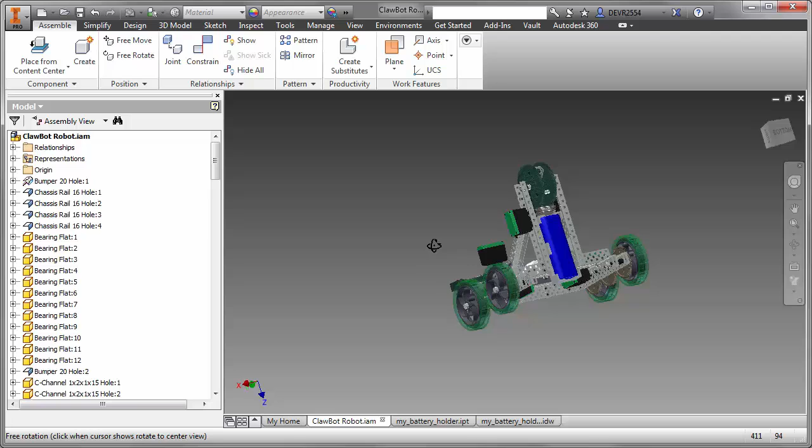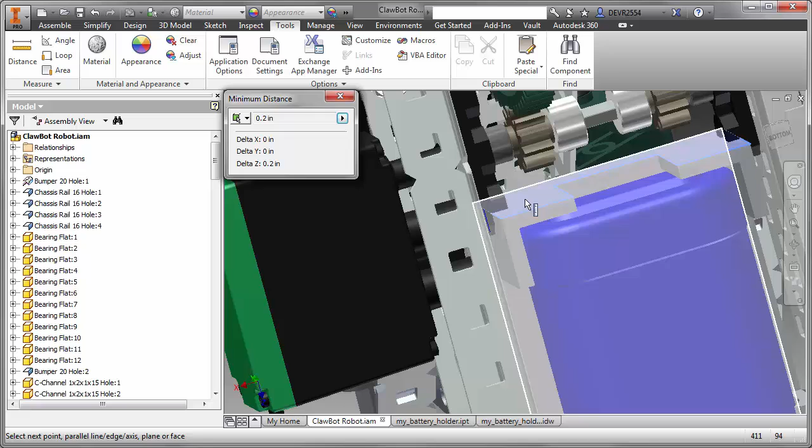The design team have reviewed the digital prototype of the robot that I sent them and have identified two problems. The first is between the battery holder and the flat bearing, so there's some interference there. Just going to go out and measure that. So from the flat surface on the bearing to the top surface on the battery holder, and that's 0.2 inches.

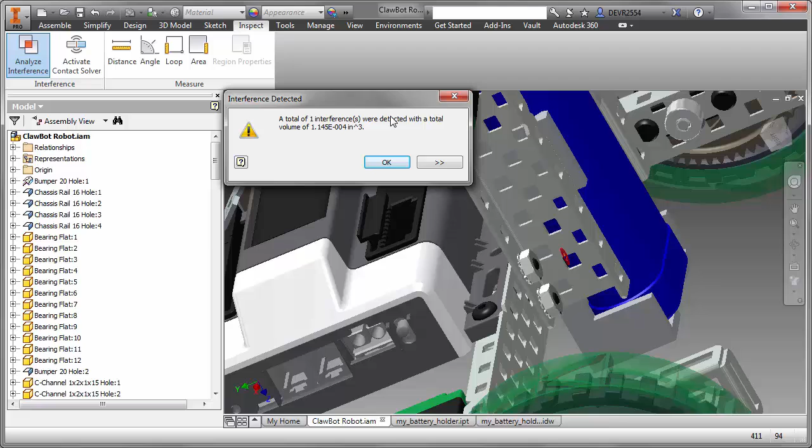The second problem is between the cap screw and the battery itself. The counterbore hole is not deep enough. So let's go in and do an analysis on that, check for interference. Select the cap screw as set number 1, and then select the battery as set number 2. And we can see that there is interference. In fact, you can see it quite clearly as I zoom in, and that's the top of the cap screw. So we'll need to increase the depth of the counterbore hole.

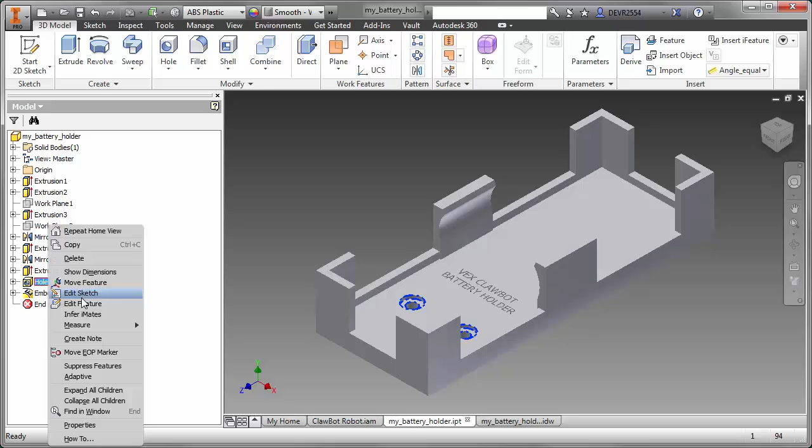We now have the battery holder part, and both of the modifications are around those counterbore holes. In the drawing, I can see that the first dimension was 1.25. I'm going to increase that to 1.5, and the depth of the counterbore from 0.06 to 0.09. I could use direct editing. I could right-click in the browser on the hole feature and either edit the sketch or edit the feature. In this case, I'm going to click on the feature itself and then select the feature icon.

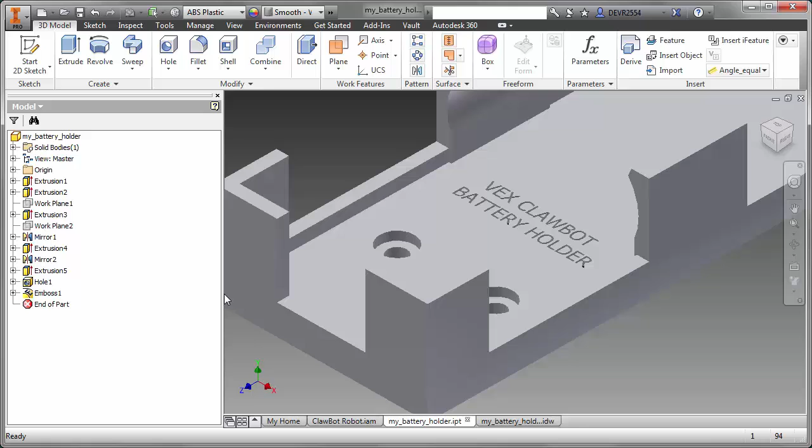The dialog box appears, and all I have to do is key in the new value, 0.09, and the depth of the hole now is increased. Same workflow. This time select the sketch icon and change from 1.25 to 1.5. And when I finish sketch, you'll see the two holes are going to move backwards. There they go, so the modification has happened.

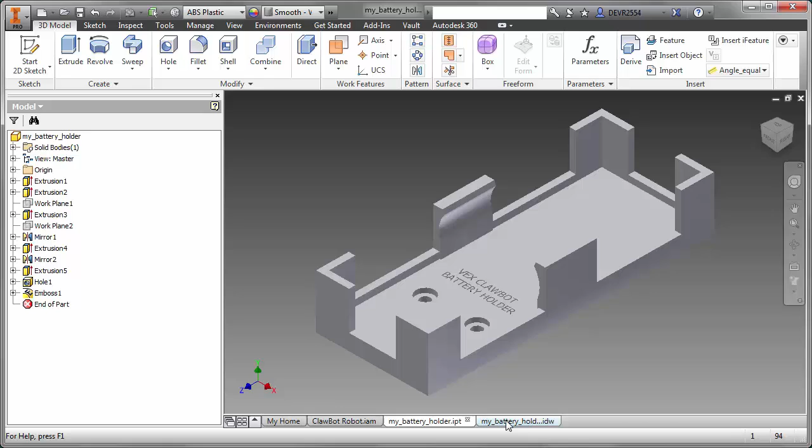I'm going to save that file, and then go back into the drawing, and you'll notice the dimensions have updated. So really, once you create the first drawing, everything else will update if you make changes in the model.

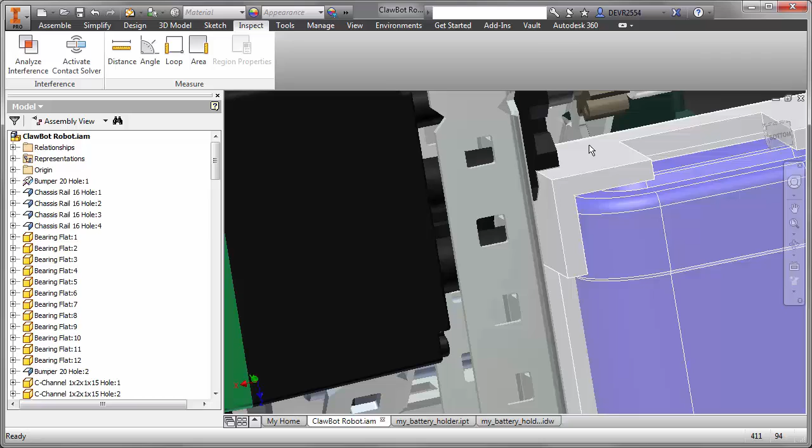Back in the assembly, let's see if that's changed. So let's check the first one, which was the interference between the bearing and the battery holder. Doesn't look like it has. What I have to do is update that. Once I do my update, then it's correct. And we can see that gap in there, so that's good. We have some clearance. Zoom in a little bit so we can see it better. There it is. So that new dimension of 1.5 is good.

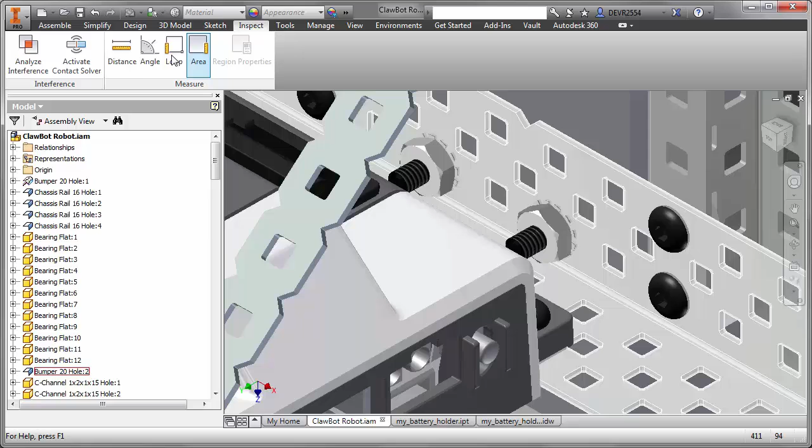Let's check out the cap screw and the battery. Check for interference. Cap screw for set 1, and the battery is going to be set 2. Of course, this time there should be no interference. Select the battery, click OK, and that's good. There's no interference.

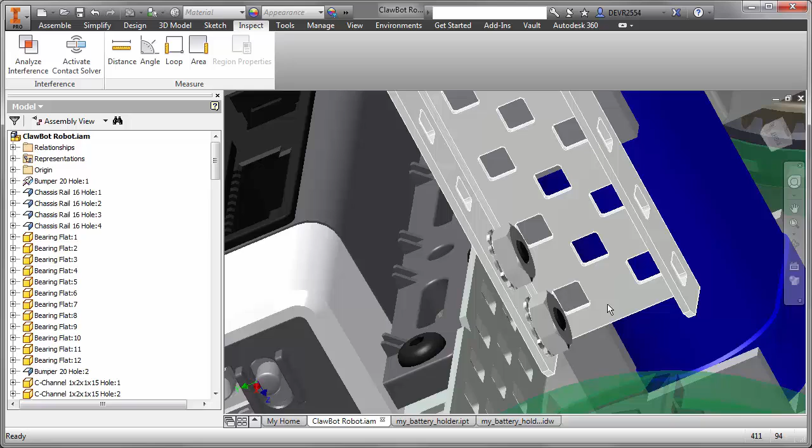With the modifications to the part completed, I'm now going to export the file to a different CAD format. I'm going to change that to STL, stereolithography. Check the options. My units are inches, which are correct. You may wish to change that to millimeters. My resolution, I'll leave it medium, and all of the other options are good. So I'm going to save that and send it over to the team to create a 3D print.

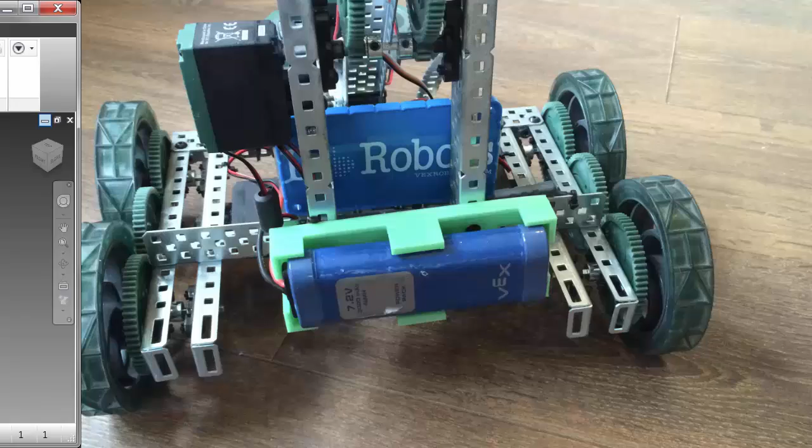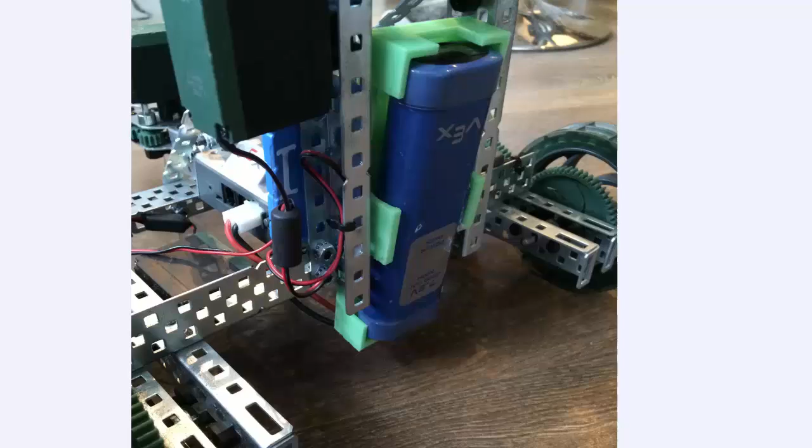The robot design team have created a 3D print of the new battery holder design. They started by assembling it in this horizontal position, as you can see, and in this case it worked very well. When the design team assembled the battery holder in the vertical position, they were a little bit concerned that the battery wasn't quite as secure as they would like. So we're going to look at a design change to the battery clips. This will take into consideration any variations in the size of the battery, but at the same time ensure that we can snap the battery in and out easily during competition.

In conclusion, we created a digital prototype in Autodesk Inventor and then sent that model to a 3D printer. By doing this, we were able to create a good design for a new battery holder.